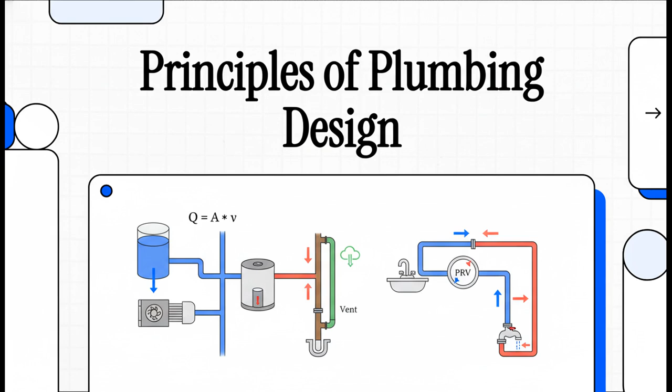Okay, let's dive right into this. We're going to break down the actual science behind a plumbing system that works, taking it from the complex rules you see in a code book to what actually needs to happen on a construction site. It's all about turning that theory into reliable pipes.

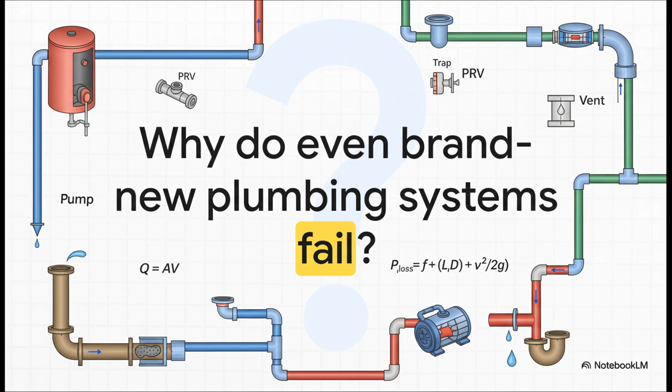It's a question that drives homeowners and engineers absolutely crazy. You've got brand new pipes, new fixtures, everything looks perfect. So why are you still dealing with clogs or leaks or even worse? Well, the answer, as we're about to see, has nothing to do with bad luck. It has everything to do with physics.

And that's really the whole point, right there. A plumbing system that actually lasts isn't just thrown together, it is engineered. You can have a total mess that's born from guesswork, or you can have an efficient, ordered system where every single part is chosen because of hard numbers.

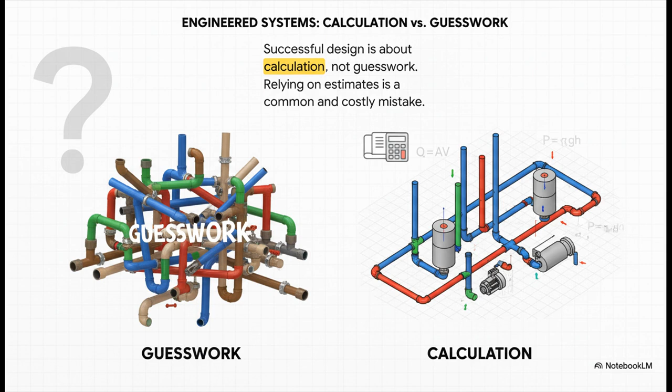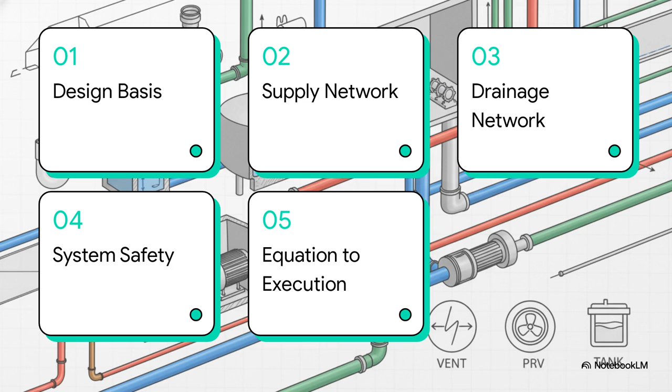So, here's our game plan. We'll kick things off with the foundational math, the design basis. Then, we're going to follow the water's path through the supply network and the drainage network. We'll also cover the absolutely critical safety systems that prevent disasters, and then finally, we'll tie it all together to show how these equations become a flawless system.

All right, first things first. Before you even think about cutting a single pipe, you have to establish the design basis. This is where we stop guessing and start engineering. This is how we make sure the entire system is built on a solid foundation of calculation. And now don't let this table intimidate you. It's basically the entire language of plumbing design. Let's just quickly run through it.

For water supply, Q is your flow rate, and you get that using fixture units, or FU. That's just a number assigned to every faucet or toilet to figure out the total demand. For drainage, velocity is everything. It's got to be fast enough to carry waste away. For pressure, P equals rho g h, density times gravity times height, which tells us how much force that water is pushing with. Look, these aren't just random equations. They are the tools that separate a professional, calculated system from just amateur guesswork.

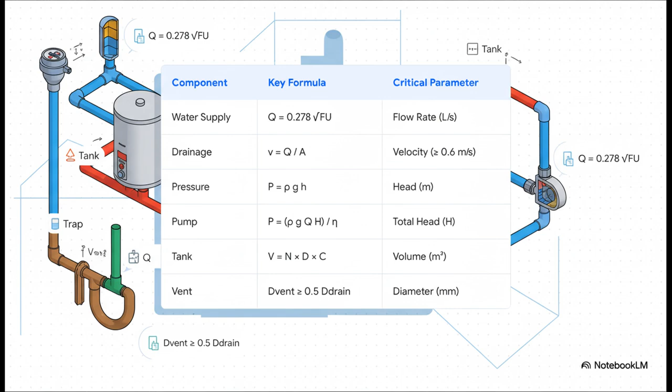Okay, with our foundation set, let's move on to section 2. Now we're looking at the supply network. This is the side of the system that's under pressure, delivering clean water exactly where you need it, when you need it. So what even is pressure? Well, it's just the weight of water pushing down. The equation P equals rho g h shows it perfectly. Pressure is just the density of water times gravity times the height of the water column.

A really simple rule of thumb is this. For every 10 meters you go down, the pressure goes up by about 1 bar. So if you've got a 40-meter building like this one, you're looking at almost 4 bars of pressure at the bottom, just from gravity doing its thing.

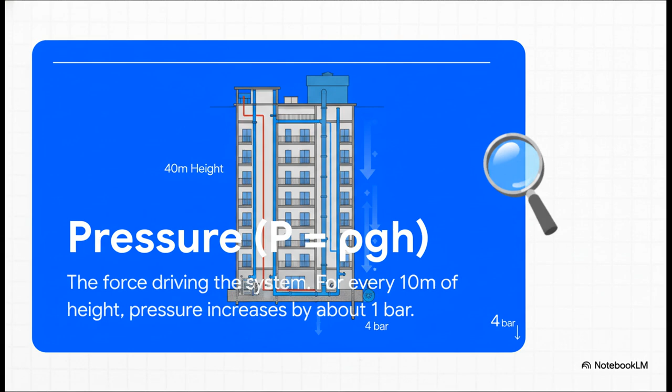Now all that pressure has to be contained, and that brings us to materials. You'll usually see PPR pipe for both hot and cold water because it can handle the heat. PVC, on the other hand, is only for cold water and drainage. A classic interview question is, so why can't you use PVC for hot water? And the answer is simple. It deforms, it cracks, it fails. It's such a common mistake to try and cut costs this way, and it always leads to catastrophic leaks. See, the material choice isn't just a preference, it's a direct result of physics.

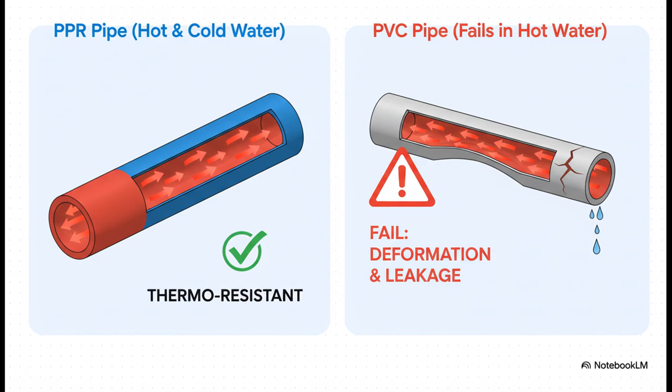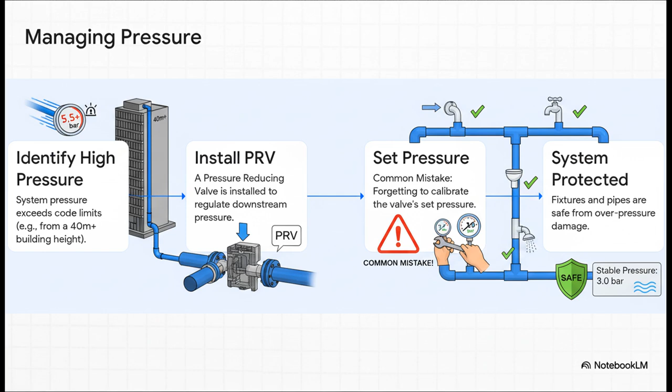So what if the pressure coming into your building is just too high? Well, the building codes say anything over about 5.5 bar is a problem. The solution is a pressure-reducing valve, or PRV. But here's the mistake you see all the time on job sites. Installing it is only half the battle. If you just walk away without actually setting and calibrating the downstream pressure, that valve is basically doing nothing, and you're still going to damage every fixture connected to it.

All right, we've successfully brought pressurized water in. Now we have to get the wastewater out. Let's switch gears to the drainage network. This side of the system, it's not about high pressure. It's about a really delicate but crucial balance between gravity and air.

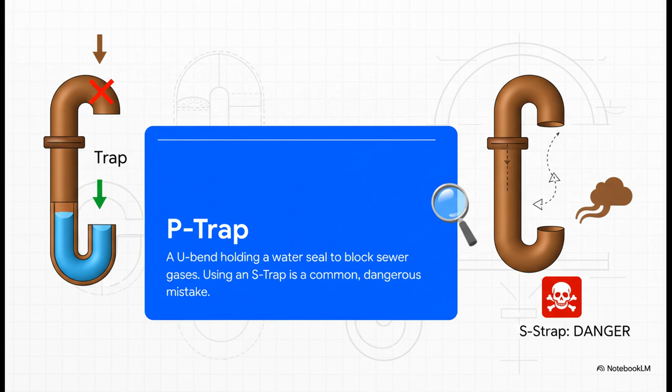This little U-bend, this is the P-trap. It's one of the simplest and honestly most brilliant inventions in plumbing. It just holds a little plug of water that physically blocks nasty, smelly sewer gases from coming up your drain. But a really common and dangerous mistake is installing an S-trap instead. The shape of an S-trap can create a full siphon, and it will suck that protective water seal right out, leaving an open highway for toxic gas to get into the building.

Okay, so that leads to the next logical question, right? Even with a proper P-trap, when a big rush of water goes down the drain, it creates negative pressure behind it. And that pressure change threatens to suck that protective water seal away. So, what protects the protector? And the answer is the vent pipe.

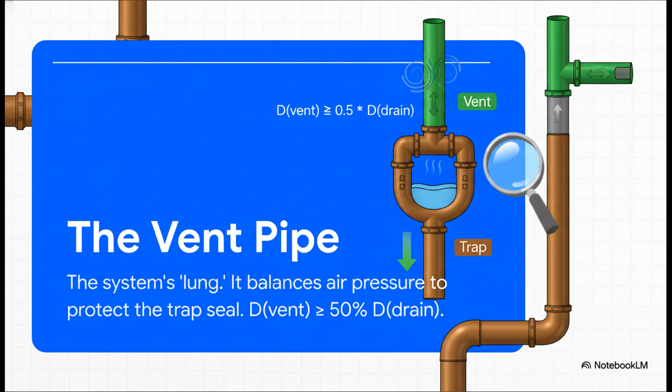I love this illustration. Think of it as the plumbing system's lung. When a slug of water rushes down that drain pipe, the vent lets air get pulled in from behind it. That neutralizes the negative pressure, and it protects the P-trap's water seal. The code is crystal clear on this. The vent pipe's diameter has to be at least half the diameter of the drain it's serving. This is not optional, it is essential.

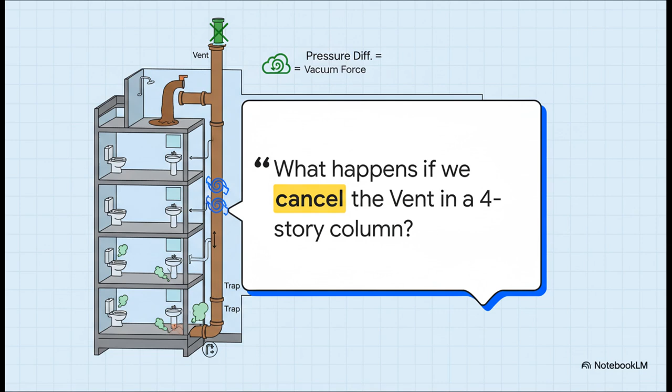And to really hammer this point home, here's another one of those classic interview questions. What happens if you just skip the vent in a multi-story building? Well, the rush of water from a toilet on an upper floor will create a powerful vacuum, and it will siphon the P-traps on every single floor below it. One little omission, one shortcut, can lead to a catastrophic failure that fills the entire building with sewer gas.

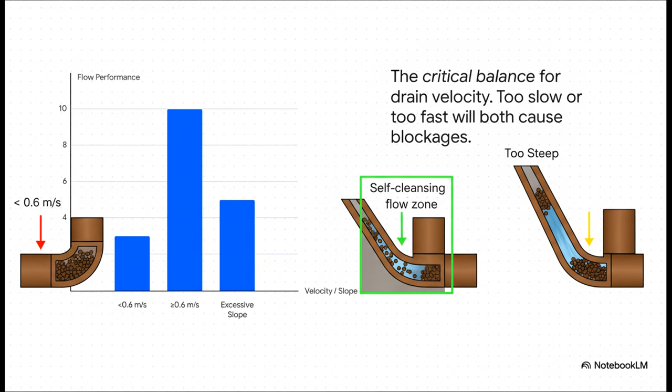Okay, now let's talk about the slope of those drain pipes. You might think, oh, steeper is better, right? But it's not that simple. This is what I call the Goldilocks principle of drainage. As this chart shows, if the slope is too shallow, the velocity is too slow, we're talking less than 0.6 meters per second, and solids get left behind. That's a clog waiting to happen. But if the slope is too steep, the water actually outruns the solids, leaving them stranded and causing a blockage anyway. You're always aiming for that sweet spot, that green self-cleaning zone right in the middle.

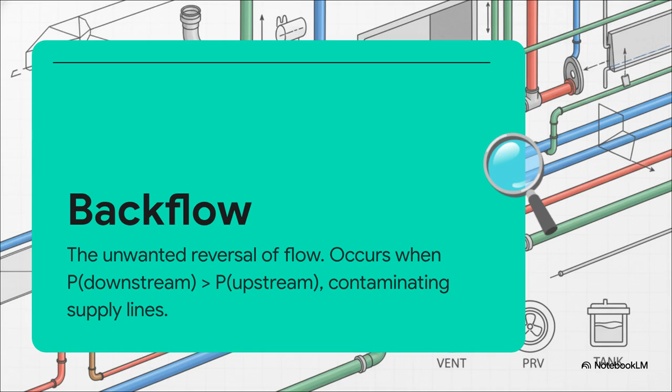So, the system is designed for perfect flow. But what happens when things go wrong? This section is all about those critical safety components that are our last line of defense against contamination and, well, total system failure. One of the most dangerous failures you can have is something called backflow. This is when contaminated water, say from an irrigation system or some industrial process, flows backward into the clean water supply lines. It happens under one simple condition: when the pressure downstream on the dirty side becomes greater than the supply pressure upstream. And that can introduce serious health hazards right into your drinking water.

So how do we stop it? Well, the main defense is a backflow preventer, a special valve that just stops that reversal. Then, for maintenance, the code demands cleanouts. These are what give us access to clear any blockages. And their placement isn't just random. The International Plumbing Code, the IPC, is very specific about where they go: at the start of every horizontal line, every 15 meters on straight runs, and after any significant turn. This isn't just about safety, it's about designing a system that you can actually maintain for years to come.

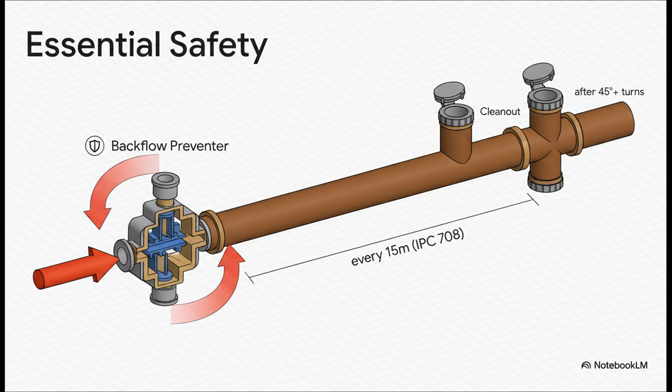Okay, let's bring it all together now. We've looked at the formulas, we've looked at the components by themselves. Now let's really reinforce that direct line between what you calculate on paper and how those pipes actually perform once they're sealed up inside a wall. If you remember just one number from our whole discussion on drainage, make it this one: 0.6 meters per second. This isn't some arbitrary target, it is the absolute minimum velocity you need to create a self-scouring flow that actually carries solids away. Anything less than that, and you're not just installing a pipe, you're designing a future blockage. It's that simple.

And that brings us to the most important takeaway of all. The plumbing code isn't just some big book of arbitrary rules they made up, it's basically a physics textbook in disguise. The requirement for a vent pipe, that's about atmospheric pressure. The rules for slope, that's fluid dynamics. The specifications for materials, that's thermodynamics. It all comes back to science and numbers.

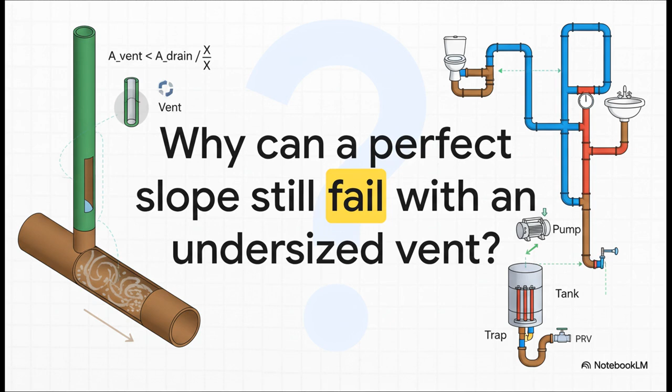So I'll leave you with a final thought to really connect all the dots. Imagine you've calculated the absolute perfect slope for a self-cleaning flow, making sure the velocity is just right. Why can that perfectly sloped pipe still clog up and fail if its vent is undersized? It's because no single component in the system works in isolation. Because in the end, success comes from seeing plumbing not as just a collection of parts, but as a complete, interconnected system. When you design with the code, when you calculate with purpose, and when you truly understand the physics behind every single connection, that's when